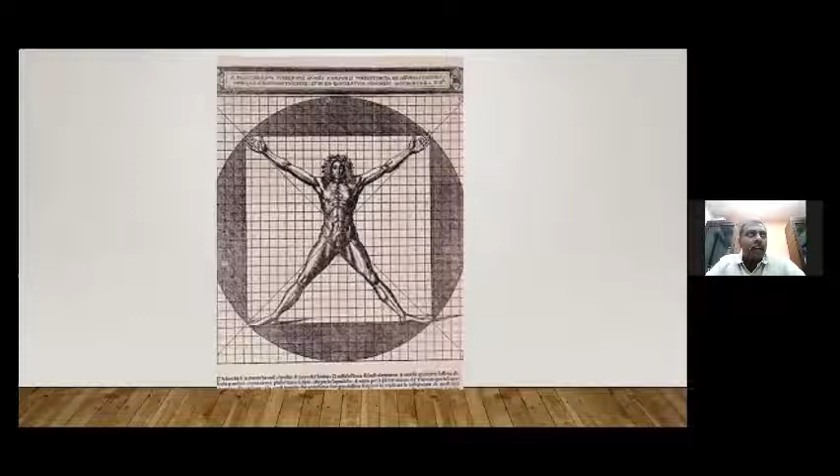Now this is called Vitruvius Man. I'm sure you would have learned about Vitruvius Man in your history of architecture or theory of architecture. Who is this Vitruvius Man? Vitruvius Man was proposed by Vitruvius. He wrote a treatise of 10 books on architecture called De Architectura, in which he told us about firmitas, utilitas, and venustas.

Now what is firmitas, what is utilitas, and what is venustas? Vitruvius says that a building should be firm, a building should be utilitarian, and a building should be beautiful. That is what he has written in his treatise on architecture.

Now, if he had lived, he would have added one more point: economitas. I'm not sure if there's a word called economitas in Greek, but I'm just coining a word like this for this session. So what is economitas, and why should the cost of a project be controlled?

Now let us look at the broader picture. Buildings consume about 40% of the total power generated, which means we are still largely depending on thermal power plants. So every unit of power consumed means coal burned and the environment polluted.

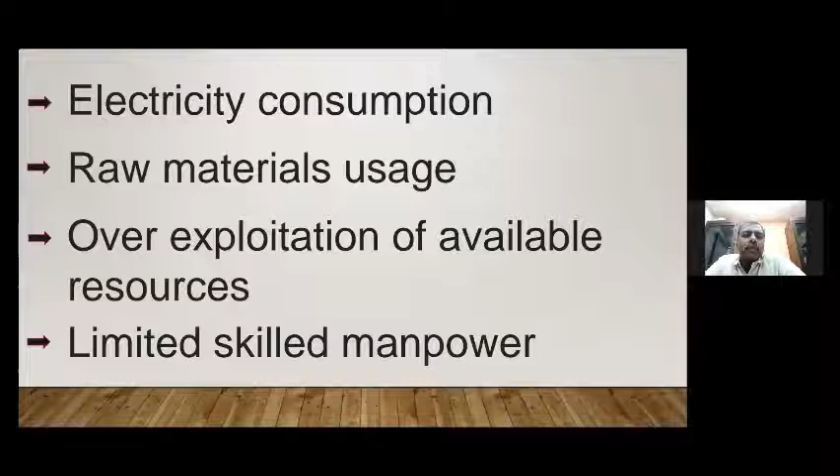Also take a look at raw material usage. Very high raw material usage is leading to overexploitation of available resources, and we have very limited skilled manpower. So this boils down to a situation where we'll have to tone down our requirements and frugally use our available resources.

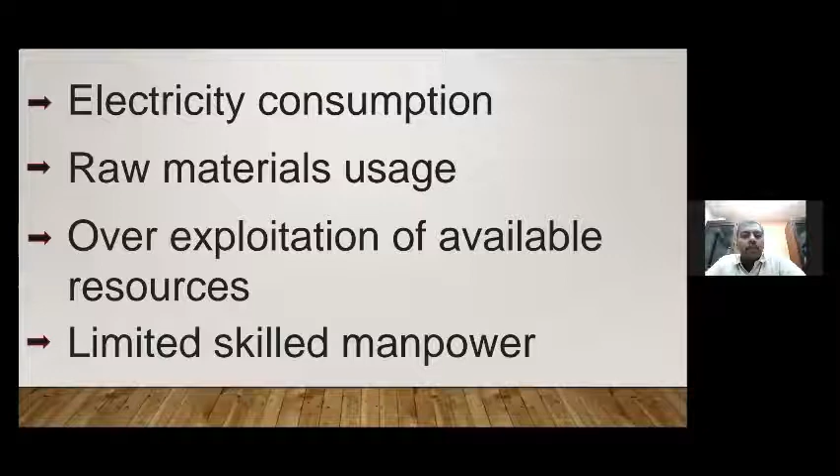Now take this project for example. We have recently submitted a feasibility report for this project. This is a project in Chennai, proposed to be built on a 2-ground plot measuring 18 meters by 24 meters and abutting a 9-meter road.

Now students and fellow architects, if you look at this site a little closely, you'll understand that CMDA is giving us 3 options for development: one is a stilt plus 3 structure, another is stilt plus 4, and another is stilt plus 5. Which one among the 3 is going to be the least expensive option?

We did a small calculation. Look at the first option, a stilt plus 3 structure: the total area, including the stilt, turned out to be 1152 square meters. The second option, stilt plus 4, the total area turned out to be 1080 square meters. Now look closely, you'll find that the total built-up area, including the stilt, for the same 864 square meters maximum built-up area, is getting reduced by about 72 square meters.

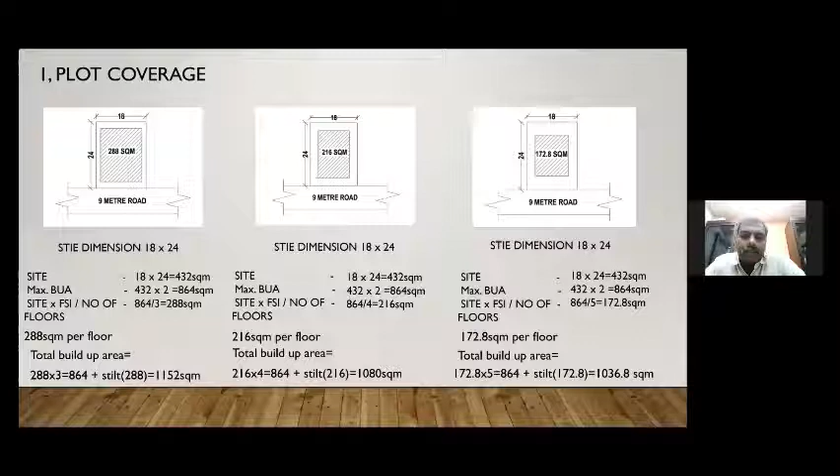Now the going construction rate for the stilt floor, let's say, is about 20,000 rupees per square meter. So 116 into 20,000 rupees works out to roughly 22 lakhs. And what is the additional expense in foundation or taking the lift to 2 further floors? Probably about 5 or 6 lakhs. So there is a savings of about 16 to 17 lakhs in the project.

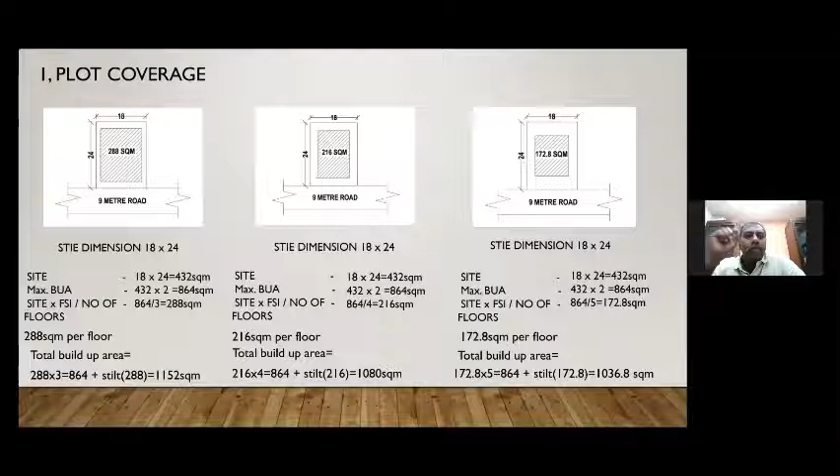So we have to figure out which is the best option when it comes to the building footprint. Lesser the building footprint, more the open area. More the open area, more lighting and better ventilation for the project.

Now look at this window area. Most of us would think, what is there in a simple, humble wooden window or a UPVC or aluminum window? Look at this 1.2 by 1.2 square meter window. The total area is 1.44 square meters. The glass area is 0.76 and the wood area is 0.68. The ratio of glass to wood is 53:47.

Take a look at that 5 feet window, the 1.5 meter window. The total area of the window is actually 1.8 square meters, and the glass area is 0.85. Wood area is 0.95, and the glass to wood ratio is actually 47:53. The ratio is actually reversed.

Not only has the glass area become substantially lesser, the wood area has increased, thereby increasing the cost of manufacture of this window. So what happens is we spend more and get less light. When we spend more, we are supposed to get more light, and the efficiency of the window is supposed to go up, whereas now this is coming down. So we should design windows in such a way that the glass area is optimally utilized.

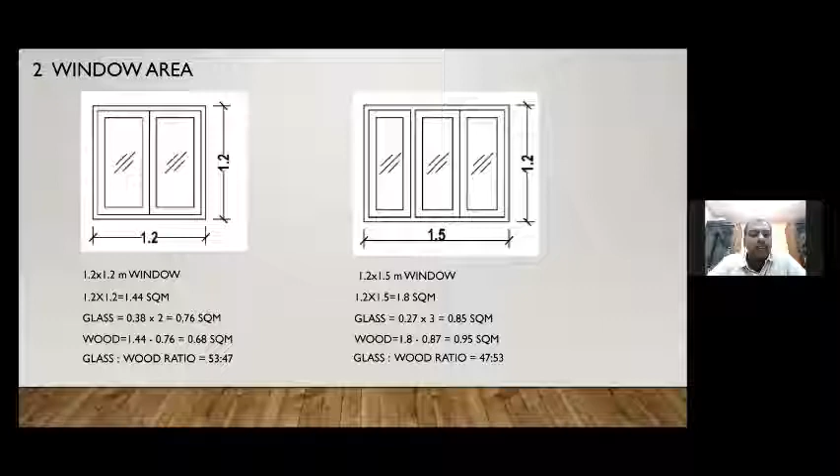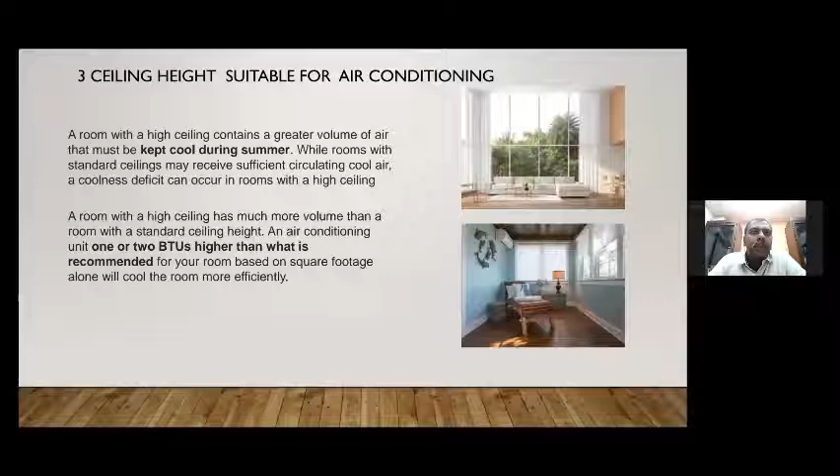Similarly with air conditioning, a higher ceiling is going to end up in higher power bills, whereas a lower ceiling might not look very attractive for an interior. So it has to be controlled at an optimum height to make sure the power bills don't go up, while the interiors also look attractive.

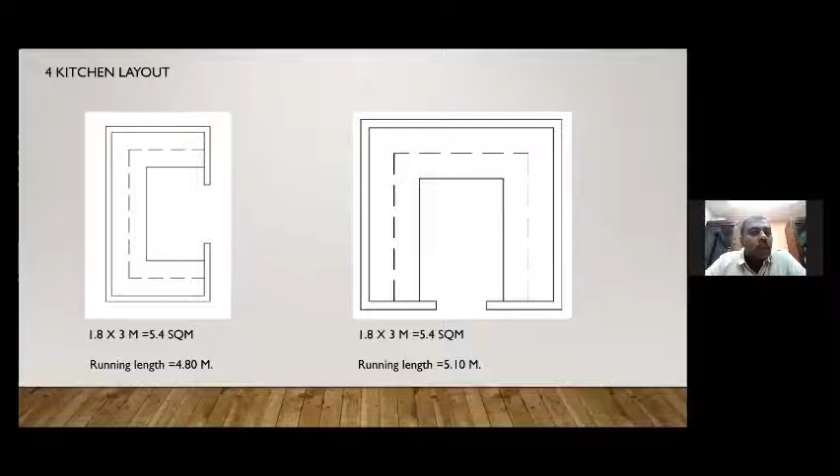Now take a look at this kitchen layout. The one on the left side is 1.8 meters by 3 meters, which is 5.4 square meters. And the one on the right is also a 5.4 square meters kitchen, but the dimensions are slightly different, 2.25 by 2.4. Same 5.4 square meters on both sides.

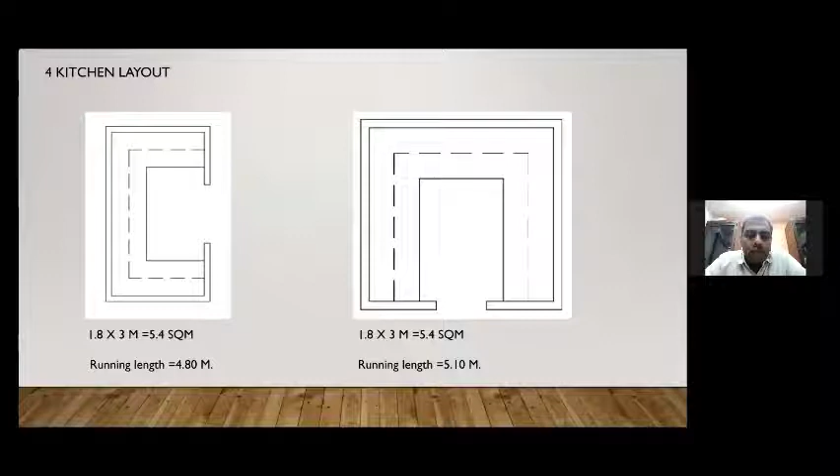But the running length of the counter varies. For the same given area, the rectangular kitchen offers only 4.8 meters of running length of kitchen counter, whereas a square kitchen offers 5.1 meters of kitchen counter.

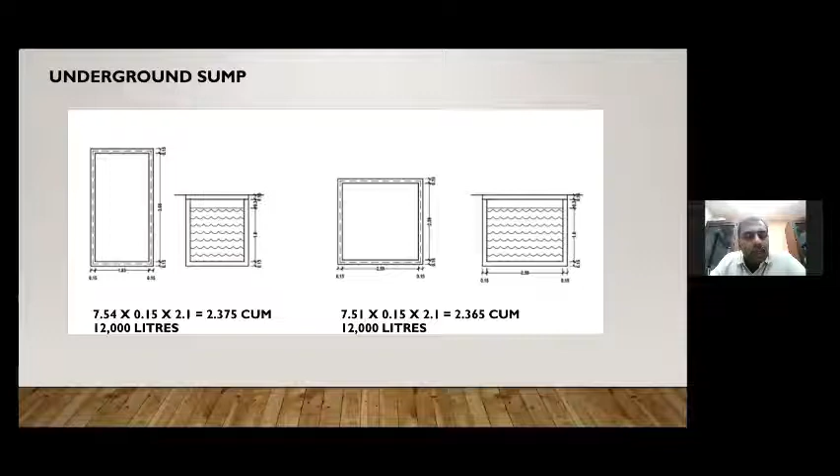So including that, the rectangular sump will consume more concrete and more steel, making it more expensive. The square sump is less expensive with lesser building materials. Not only that, the square sump will have lesser shear stress and also lesser thrust from the underground soil. But a rectangular sump, because it has two longer walls, the thrust due to the underground earth will be very, very high.

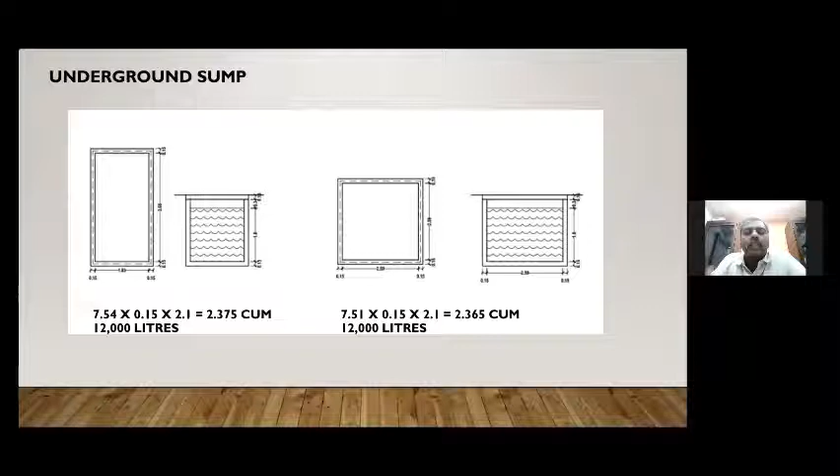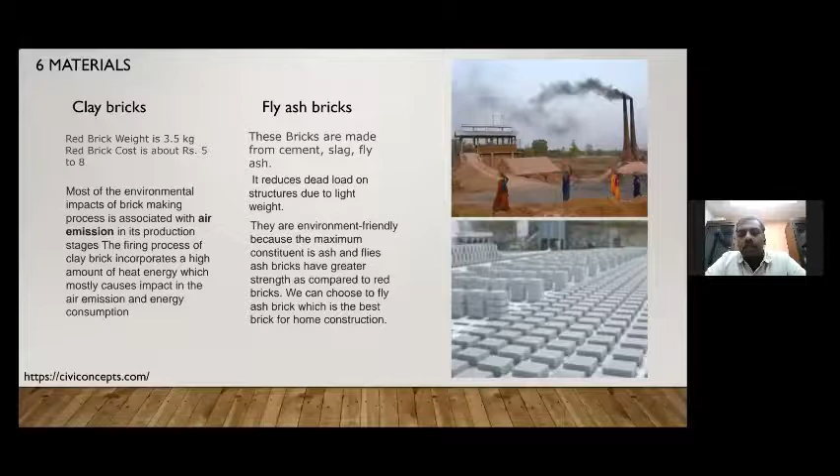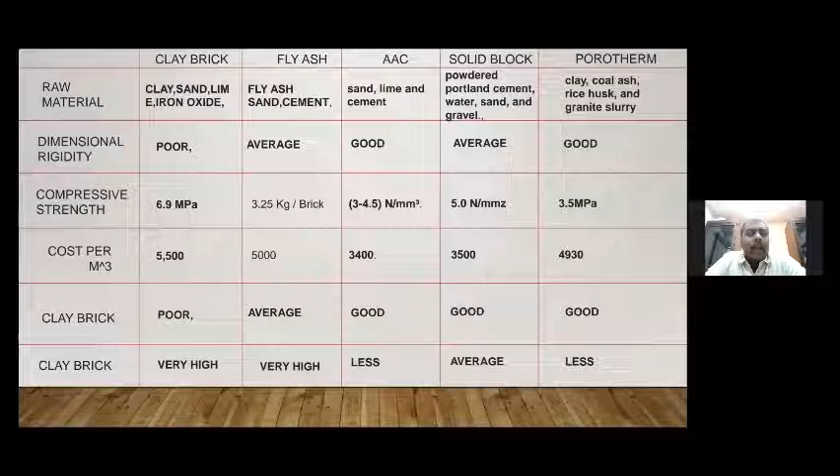Now we all would have come across bricks - none of us would have missed bricks in our life. The clay brick is the most often seen building material, and now it is slowly getting replaced by fly ash bricks. The other building materials these days are AAC blocks, solid blocks, and Porotherm. Now it might look as if all these make no difference, or that clay is the most suited building material for us. But actually, clay is the least preferred building material when we do a proper comparison with other building materials.

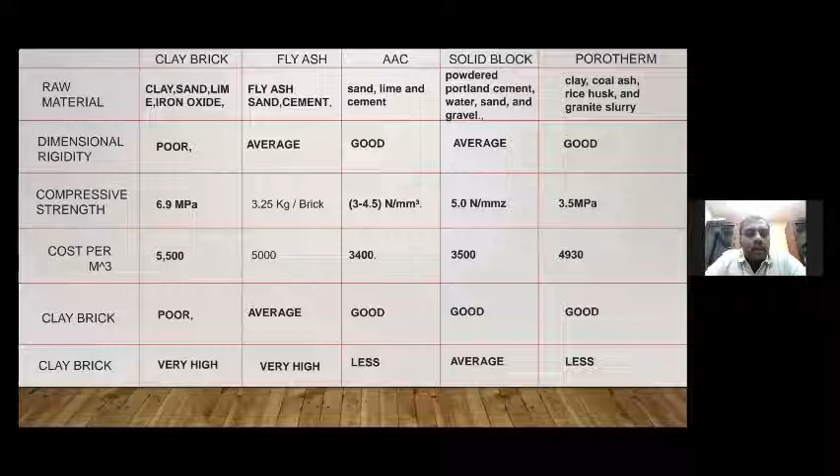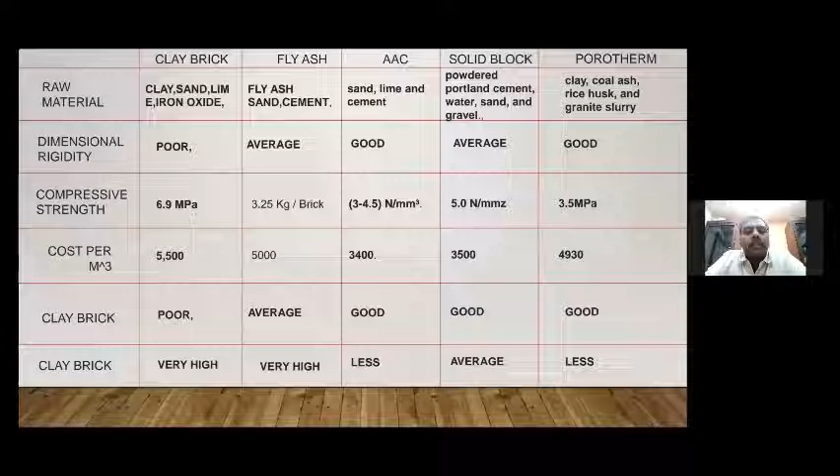Clay brick is made from clay, river sand, lime, and other materials. Whereas a fly ash brick is made from the fly ash that is disposed of by thermal power plants as a byproduct. So something that is lying as a byproduct is being used as a building material, which is a very, very positive sign.

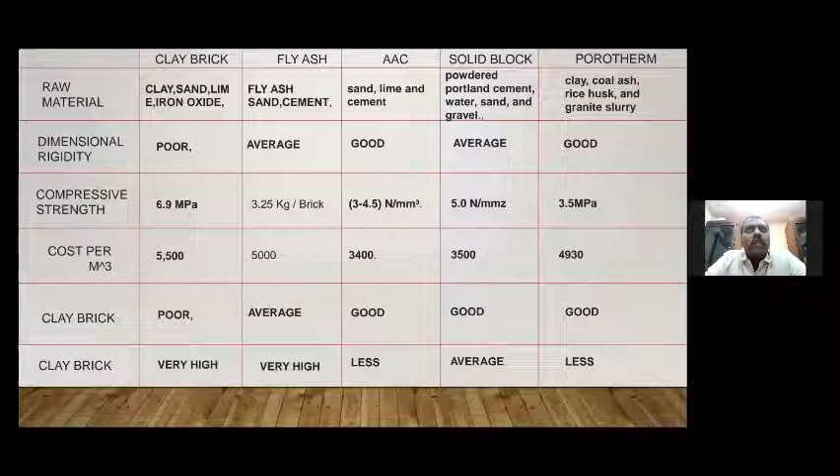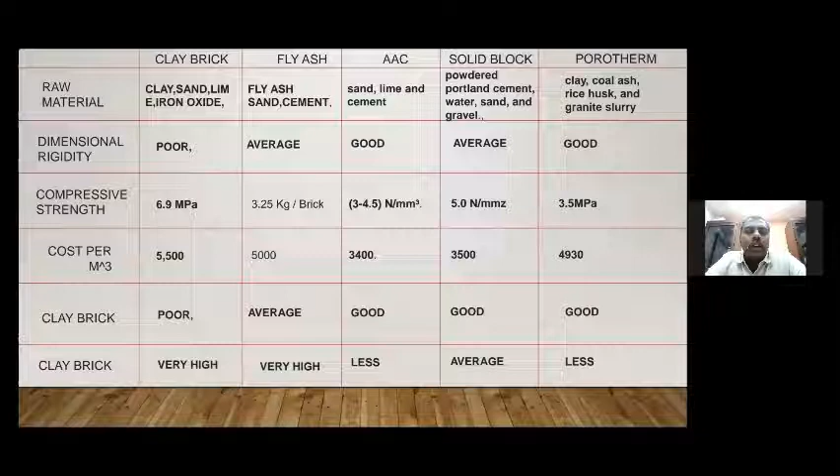AAC blocks, invented sometime in 1924, are very lightweight concrete blocks which will float on water. The density is actually less than 1, so it can float. That is the beauty of AAC blocks. Solid block is slightly heavier, but it is not as bad as the clay brick, though not as good as the AAC block.

It is cheaper. And Porotherm, most of us would have seen Porotherm - if someone wants to see it, Kottapuram Anna Boys Hostel has Porotherm blocks. It is again made from clay. It is actually exploitation of clay because in India, as of today, only one plant exists, operating from Bangalore, and we are overusing clay.

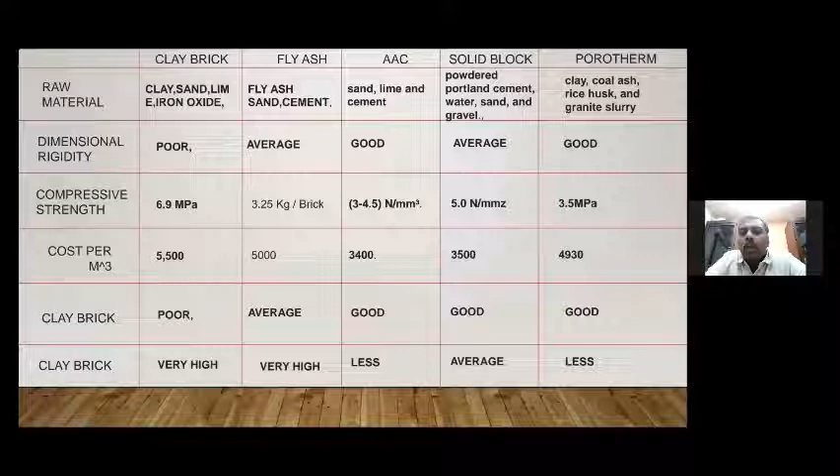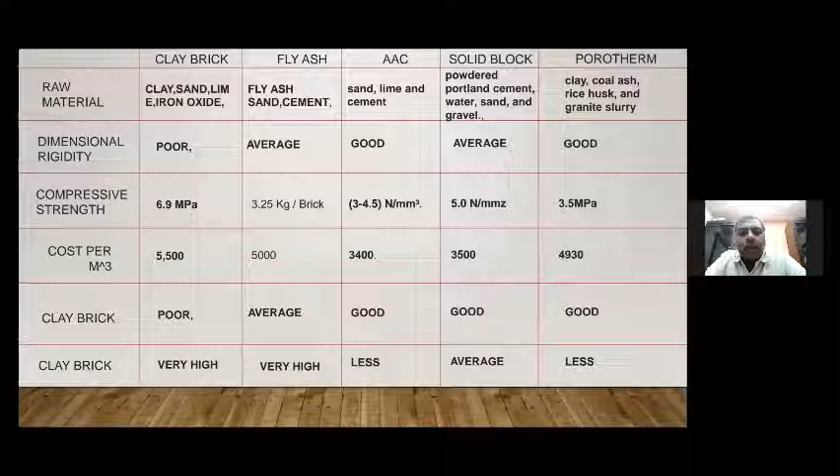So my personal choice would be AAC blocks. Why? Look at that fourth row, cost per m cube. AAC block is the least, 3,400 per m cube, and the bricks are the highest. And the finishes - AAC block is really good.

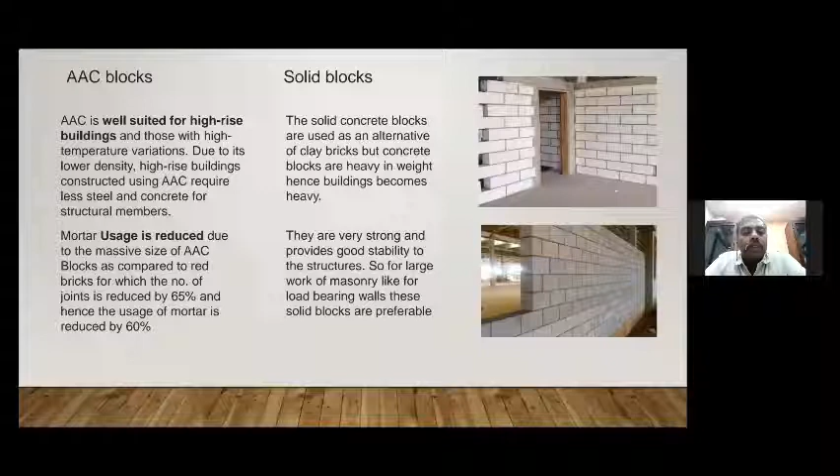We all know that every brickwork needs to be plastered on both sides. For that matter, any of the materials we saw in the previous slide needs to be plastered on both sides, whereas AAC block is an exemption. What happens is you just have to do 2 to 3 mm thickness of gypsum plaster on the inside if there is no water-related application in that room. If it's not a toilet, not a kitchen, then you can definitely do it with gypsum plaster, and it reduces the wall thickness, reduces the expense, reduces the construction cost also.

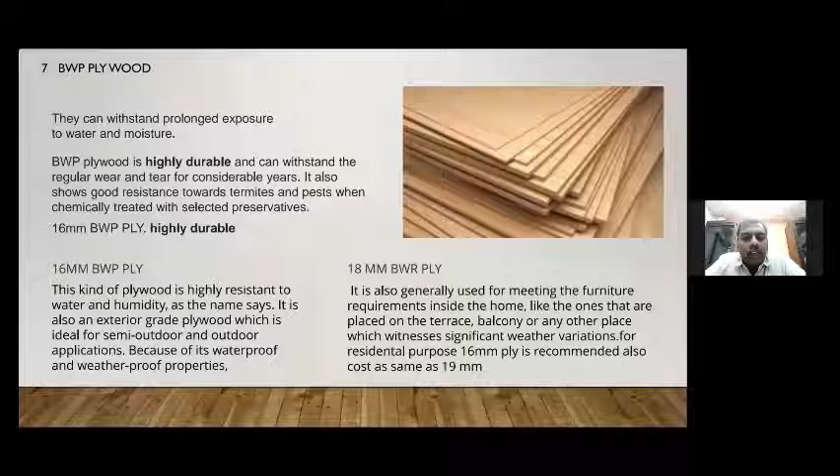Now coming to plywood. Plywoods are nothing but layers of ply stacked one on top of the other in that direction. There are several grades of plywood: commercial plywood, boiling water resistant, boiling water proof, and so on.

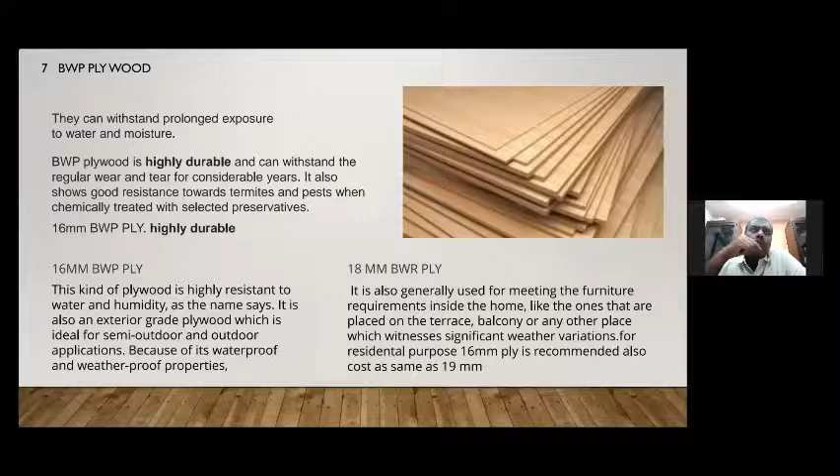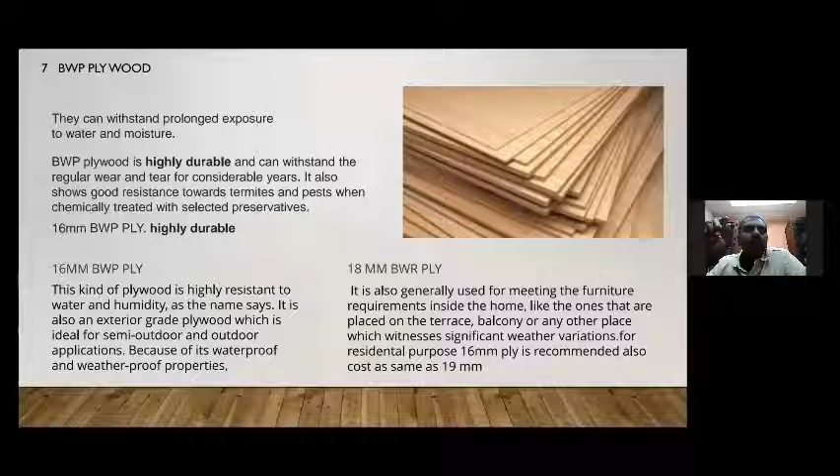Boiling water proof is the topmost when it comes to quality, categorized under IS 710. While it might look like 16mm is less strong than 18mm BWR, when you take a closer look at the BWP chemical composition and manufacturing process, we find that a 16mm BWP is stronger than an 18mm BWR, and it is also less expensive. So we normally prefer a 16 BWP instead of an 18 BWR.

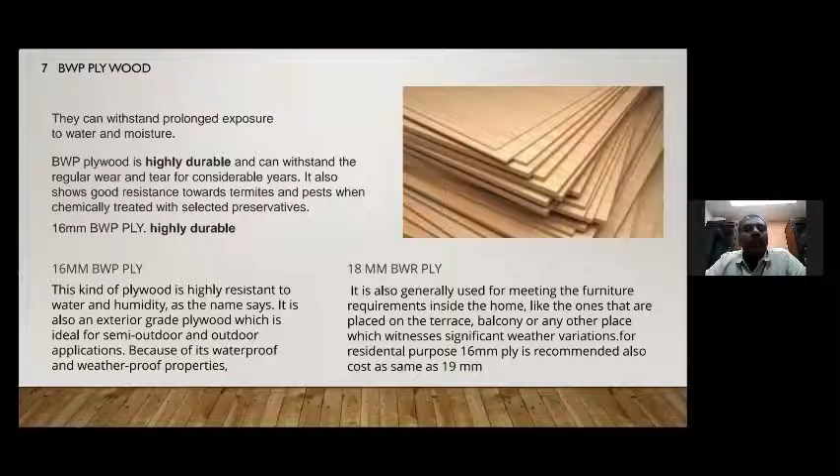Now let's take a look at grill designs. Grills are essentially meant for safety. While an intricate grill design offers a lot of aesthetics, end of the day the maintenance is expensive, the manufacturing cost is very expensive, and the painting cost - everything is very expensive compared to a normal, simple grill design. So what I would suggest is let us stick to a normal, simple grill design, simple geometry, horizontals and verticals, which is easy to maintain.

You want to dust the grill? Yes, it is easy. You want to paint it? Yes, it is easy. Any sort of maintenance is actually easy when you compare it with the intricately complex, detailed grill. So let us do a comparison when designing a grill, and let us try to optimize the cost as much as possible, not only for today, but on the longer run also.

Cement - what is there in cement? Most of us would have seen that Ultratech cement ad. Every 5 minutes it flashes on the TV screen, someone builds a house adjacent to a railway track, there is vibration, and the son suggests his dad use Ultratech cement, and the building is so strong, firm, whatever. Every time I look at that ad, I laugh my heart out, because there is actually nothing special in the cement. There is a lot of engineering that has to go into it, and a little bit of architecture also when it comes to the structural stability of a building.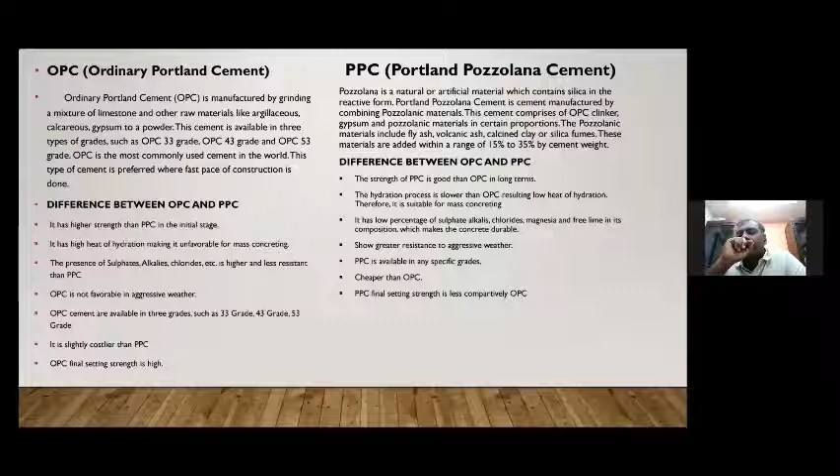Most traders and most cement manufacturers will want to sell only OPC, not PPC. But it is our responsibility to have a word with the structural consultant and our client, take them into confidence, and tell them that PPC is actually better for the project, and let us go ahead and use it. Not only is PPC cheaper, and I'm not suggesting it just because it's cheaper or has greater ultimate setting strength, but it is also a greener building material than OPC, because it has got a blend of 15 to 35% fly ash.

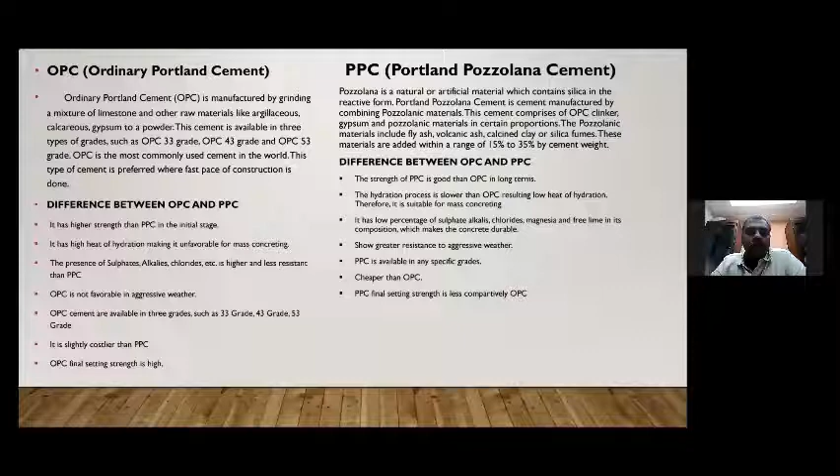This is a comparison of OPC and PPC.

This is another thing we'll have to take a closer look at. We have seen basements in malls, theaters, hotels, and many other places. Now, which is better for parking of cars? If there is a limited number of cars, stilt parking is still a much better option compared with a basement.

Let's say the cost of construction of stilt parking in today's context is 20,000 rupees per square meter. But the cost of construction of a basement floor is much higher, at least 1.6 times the construction cost of a stilt, which means at least 32,000 rupees per square meter for a basement. And with basements, we have lots of water seepage problems.

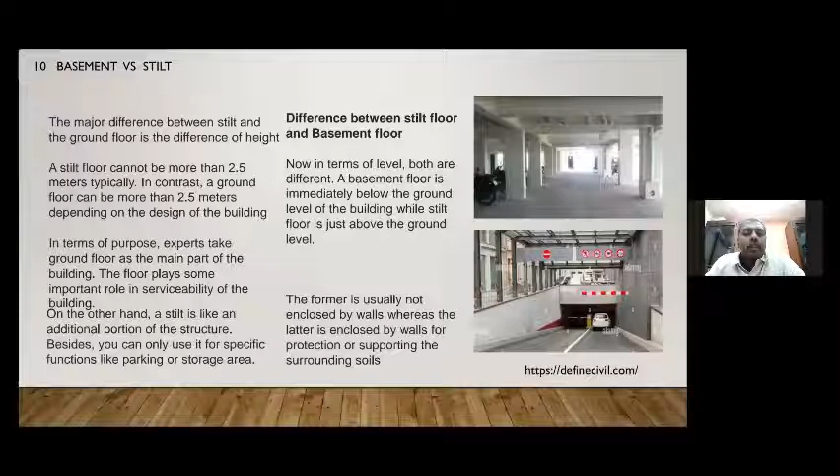Every time a basement is built, we'll have to do waterproofing from the positive side, which is the side in contact with the earth. It's a very tedious process, and it has to be maintained. There is also a lot of power spent on air circulation inside the basement. Exhaust fans have to be in place, and they'll have to work cyclically to extract the stale air. So these are problems in basements, and the deeper you go, the higher you spend.

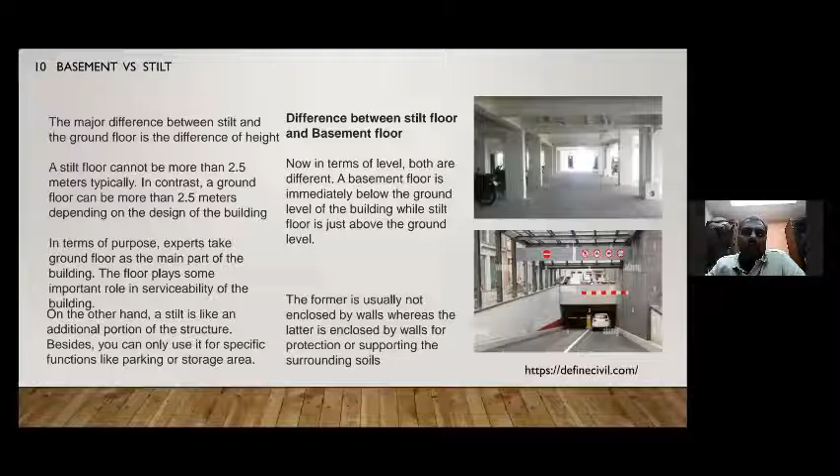So if possible, let us stick to just stilt floors, and as much as possible, take the additional parking that is required to the higher floors. CMDA these days is giving a rebate on the height of the building if you take the parking to a higher level. Please read the CMDA document and you'll understand.

Now take a look at this housing layout. The one in the middle is the normal layout: 6 by 18 and 9 by 12. Both have the same area, which is 108 square meters. Now, among the two, which is more suited? Actually, while most of us will say 9 by 12 is the most suited in a housing layout, a 6 by 18 option is actually more suitable.

The reason is the roads are shared by the plots, with half the road shared by the plots on that side. So a 9 by 12 plot shares half the road and has a slightly higher area of 135 square meters, whereas a 6 by 18 plot shares half the road and consumes less, at 126 square meters. So there is a saving of about 9 square meters.

So if possible, let us do linear plots. I mean, let them not be too linear, but at the same time, let us make sure the length is greater than the breadth, not the breadth greater than the length. That way we'll have a more economical plot in a housing layout.

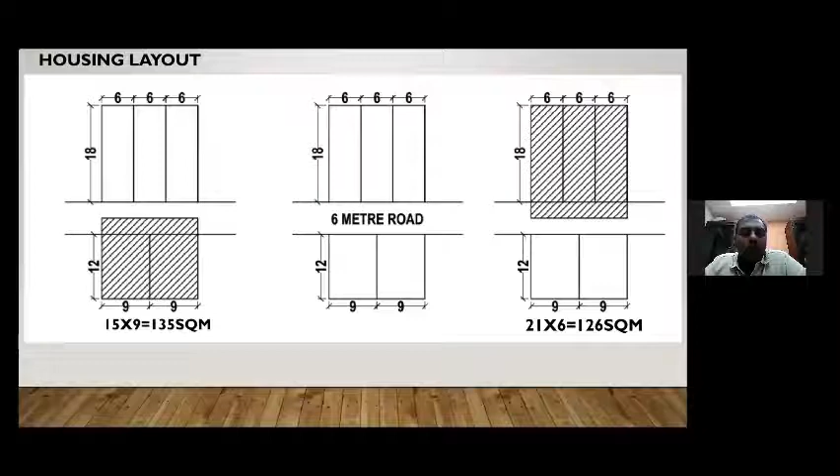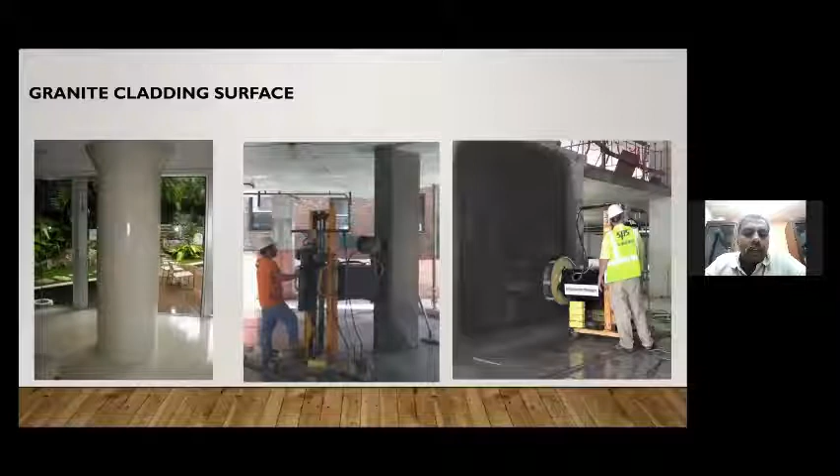We can actually polish the surface of concrete. If you can see the picture in the middle, it is a concrete column which is being polished by a concrete polisher. Look at the picture on the right, you see a polished surface. This is actually very interesting.

Let me go back to the previous picture. Take a look at the column at the center. Now let us imagine there is no granite cladding there; instead, we are polishing the entire column from top to bottom. We'll have a mirror finish, a completely unique concrete polished surface with no granite. Why am I trying to avoid granite? Am I averse to granite? No, I'm not at all averse to granite.

I love granite, but should we overuse granite? Every time granite has to be brought to a site, it is quarried, blasted, cut to size, and shipped through a container or lorry. They use a gang saw, and of the rock that is quarried, hardly about 70% is utilized. The balance 30% is actually going as waste. So for that reason, I would prefer to use these resources frugally.

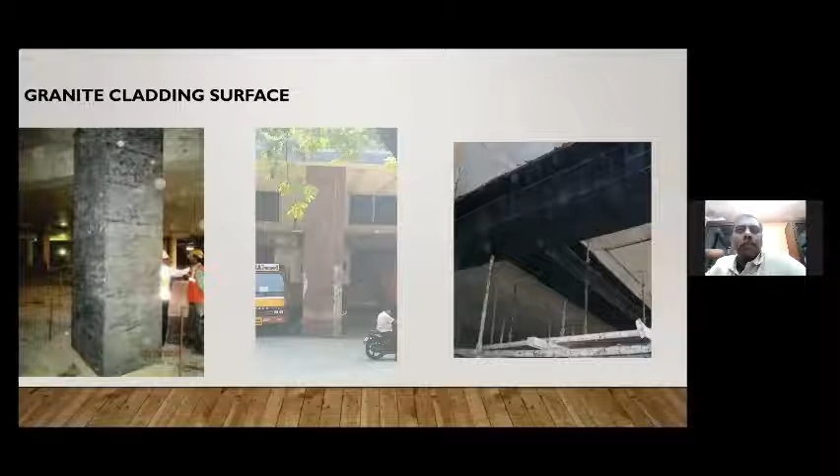So what do I mean? I have a polished granite surface. I can use granite for the capital and for the base, and leave alone the central shaft, which I'll polish instead. I'll use a 0.5 meter or 1 meter capital at the top and another 0.3 or 0.4 meter base at the bottom. That way, I'm minimizing the use of granite in my project.

I think this is the last slide I've got. I'm not sparing landscaping also.

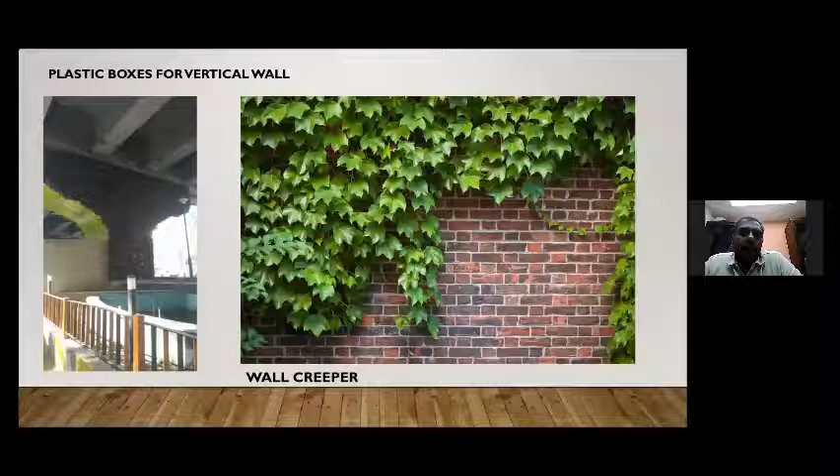This is again a picture that I shot today. The one on the left is the Tirumangalam flyover column. They tried to do a vertical wall, a vertical garden, and it looked so nice about 3-4 months ago when it was initiated, but now it has lost its sheen. All the plants have withered away. Only the plastic pockets are lying there, fixed to the wall. Now, should we try all these gimmicks? The cost is roughly about 3,000 rupees per square meter. At such a premium price, should we be doing all these things?

Why not have a simple creeper? There are so many creepers known to us, an ivy maybe, that comes out with beautiful flowers. Let us try such landscaping. There are many plants that grow under shade, we'll try them out, it costs nothing. Most of the native species are maintenance free, while exotic species require so much maintenance. So let us try our native species and keep it very simple and frugal.